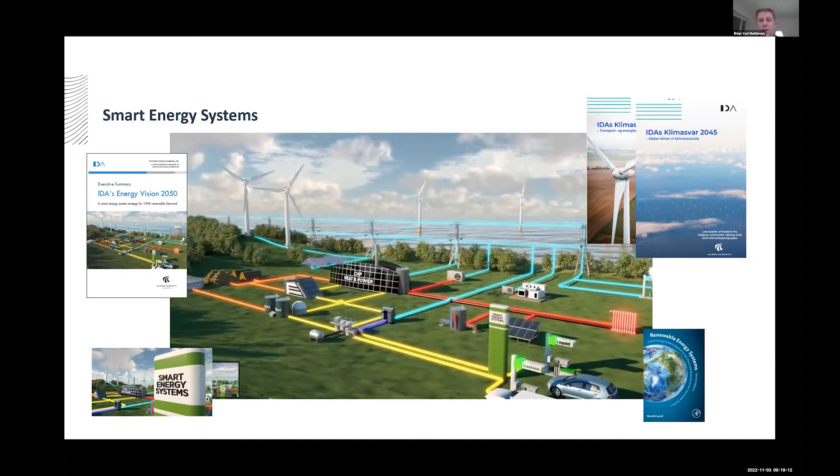So the concept that we look at in my research is called smart energy systems. And smart energy systems means that we use all of the energy carriers to create a much more flexible and robust system. Mainly, probably the electricity grid and the gas grid, but we also work quite a lot with the thermal grid and district energy in order to create more options for energy storage. And by looking at this in a more holistic perspective, we're able to find synergies across the system. And I'll just try and show you here one example that may illuminate what this is about.

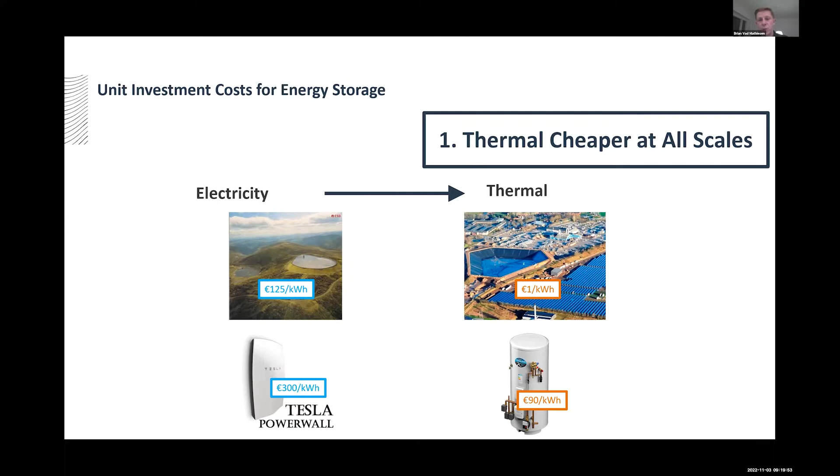If we look at a renewable energy system, all of us know that we have to have some kind of storage. And there's a huge difference between electricity storage and thermal storage. If you have a cheap electricity storage, well, right now the euro is the same as the dollar, so you can relate to it. So it's 125 dollars per kilowatt hour in a pumped electricity storage on a hill. But if you have a really large thermal storage, it can actually be $1 per kilowatt hour. So there's a factor of 100 between storing electricity and storing heat.

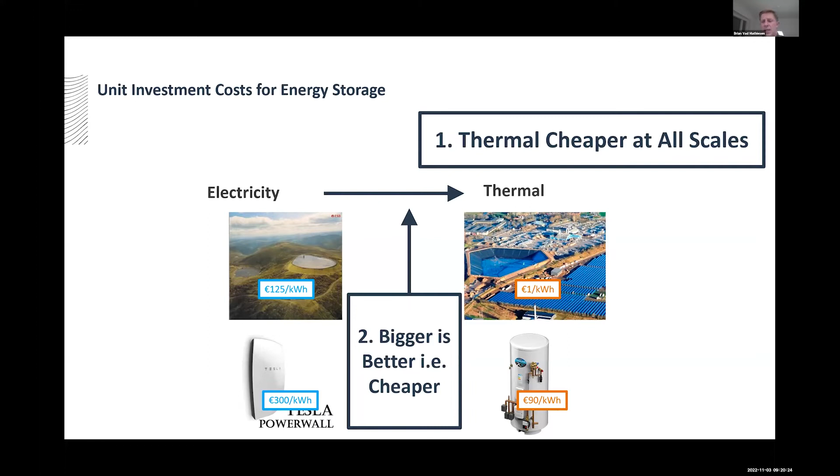And then there's the other principle, which is that bigger is actually better and cheaper. Here we see a Tesla Powerwall is maybe $300 per kilowatt hour, whereas a thermal storage in a household, 200 liters, would be $90 per kilowatt hour. So these principles tell us that thermal is much cheaper than electricity.

And if you put it into a diagram, which is done here, you can see the efficiency of storages and the cost of storages. And what we see is that thermal storage is 100 times cheaper than electricity storage. Gas storage is maybe 20 to 50 times cheaper than thermal storage, and liquid fuel storage is 2 to 5 times cheaper than gas storage.

And when we talk about gases and liquid fuels here, we're over in a power-to-X world, electrofuel world, where we want to create some sustainable fuels for ships and aviation. So that's one thing. And also then there's the efficiency. If you have a battery, for example, or a pump storage for electricity where you want to get the electricity back as electricity, then there'll be a round-trip loss. And by all means, you want to avoid round-trip losses if you can use the electricity directly.

Some may say that, well, we cannot store in thermal energy and get electricity, but that's not the idea. The idea is we store thermal energy in order to have a shower, which we're going to do also in the future, or to heat a house. Batteries we need, by all means we need them, but then, for example, we store electricity in our electric cars or electric trucks, and then we wait with using it until it's relevant for us to use. We don't try to put the electricity back on the grid, because this creates all of these round-trip losses. So this is part of the smart energy system.

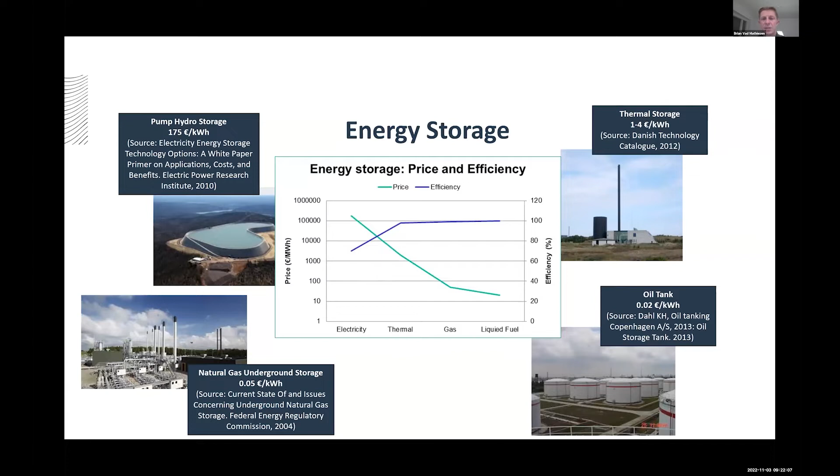Another part is actually energy efficiency. And here we had this project called sEEnergies, where we set up a modeling approach. We looked at buildings, transport, industry, energy grids, and we tried to do systems modeling and spatial analysis. And actually what we did was we created bottom-up models for all of these sectors in order to have a very deep understanding of what is actually possible.

For example, in an industry, you actually really need to know what is in that black box of industry. What are the temperature levels? Do they need steam? Do they need really high temperatures? Is it a steel manufacturer? Or can we replace some of it with district heating? Can we replace some of it with direct electrification or a heat pump? Where do we need to use biogas? Where do we need to use hydrogen? And the same for transport.

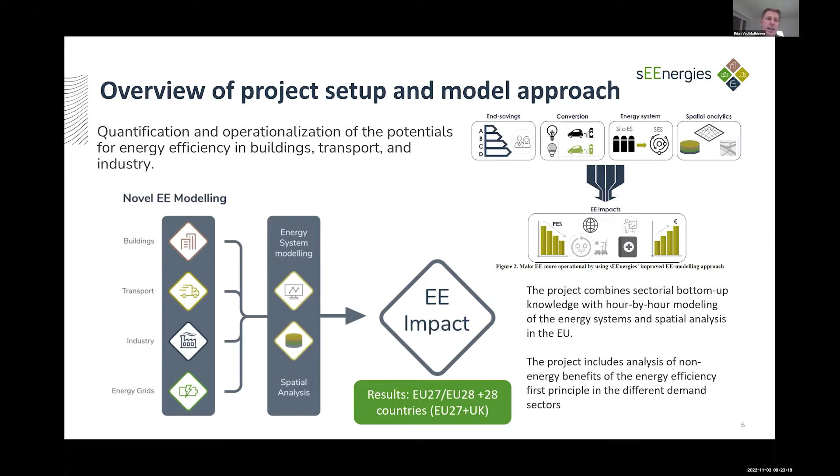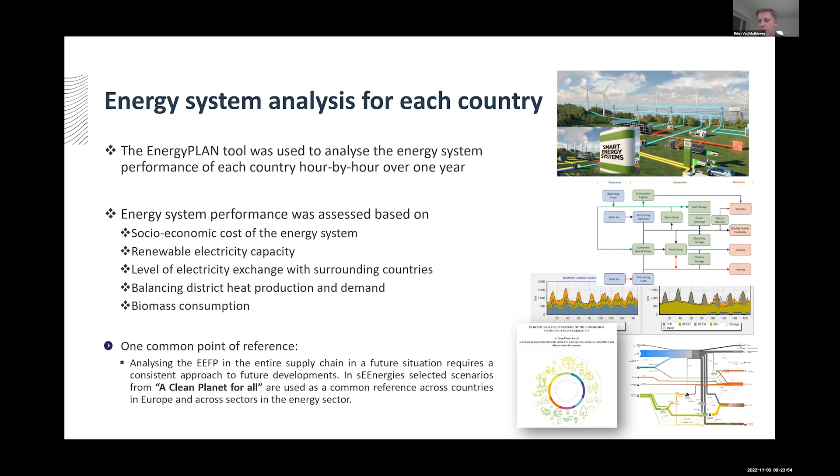So what we tried to do is we looked at all of these countries, and we modeled them hour by hour with the bottom-up knowledge of buildings, transport, industry, and the grids in each country. And in order to do so, we have used this energy system analysis tool, which is a free tool you can download, called EnergyPLAN, where we can look at hour by hour all of the system, and we can get out results on renewable energy capacities needed, the level of exchange with surrounding countries, biomass consumption, balancing needs in the energy storage side, and also the overall socioeconomic costs of such systems.

We have then in this sEEnergies project tried to identify means to actually decarbonize Europe, and we have done so by looking first at each country and then combined the countries afterwards. And when we did that, we compared this with the EU Commission's visions of Europe, and they have also made some climate neutral scenarios, and one of those is called 1.5 TECH. So 1.5 refers to the Paris Agreement, and TECH means that it has a technological fixed focus, you could say. This system still includes somewhat fossil fuels, it has CCS, it has a bit of nuclear. It also has really a lot of energy savings, a lot of hydrogen, a lot of electrification.

And what you see on this diagram here is the 2015 system and the primary energy demand of 18 petawatt hours, and then a future system where there's 13 petawatt hours used. On the final energy side, we see that today we use 13 petawatt hours, and in the future, the Commission has modeled it at 8 petawatt hours. So that means that the difference between the 13 and the 8 in a 2050 system is actually the losses we have. We want to minimize the losses because these are conversion losses.

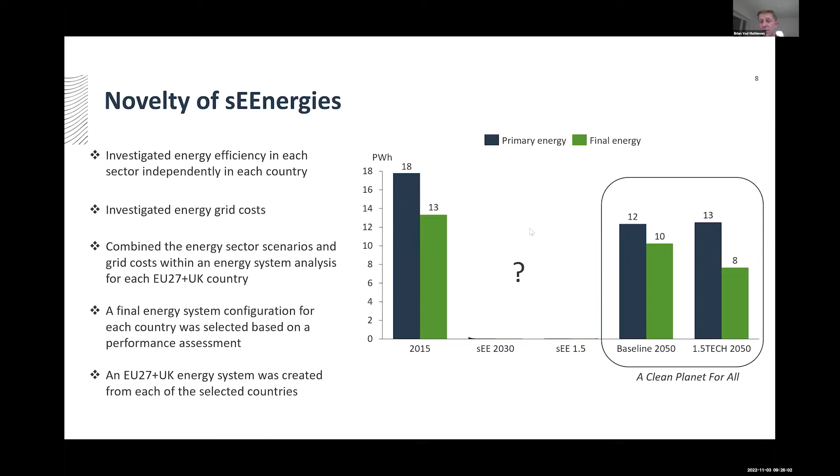For example, one conversion loss could be that we create hydrogen with electricity, and here we have a loss of around 30-35% in just creating the hydrogen. Anyway, when we do this, we're then able to assess this, and what we try to create is a new vision called SEE 1.5, and then we have a 2030 vision. SEE refers to sEEnergies.

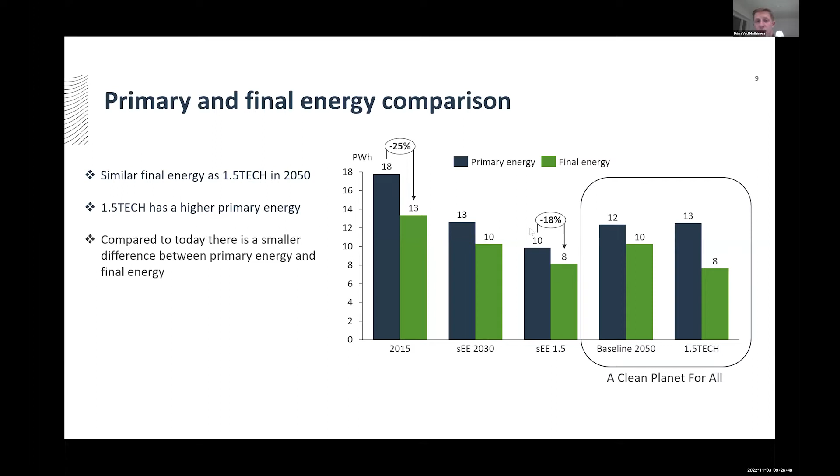Here then the results of our modeling, and I'll come a bit back into the details. So on the far right there, you see the 1.5 tech, the 13 primary energy, and the 8 in the final energy demand. And then you see the synergies vision that we have created using bottom-up knowledge of each sector in each country. And here you see we actually still have the same final demand as the Commission has. However, we have really reduced the losses, which means that our input of renewable energy or primary energy is really quite significantly lower. It's 10 petawatt hours instead of 13 petawatt hours.

If we look at what the mix is, before I go into further details, we can see that in the 1.5 tech scenario from the Commission, you can see on the top here, you still have fossil fuels, you still have nuclear, and then you have biomass and renewable, the yellow one. In our vision, you see we have slightly more wind and solar, 7 petawatt hours, and then we have the same amount of bioenergy, but we're actually able to exclude the nuclear and fossil fuels. If we have nuclear, we can fit it in, it's not a problem, but we have modeled a system where we're able to do it without.

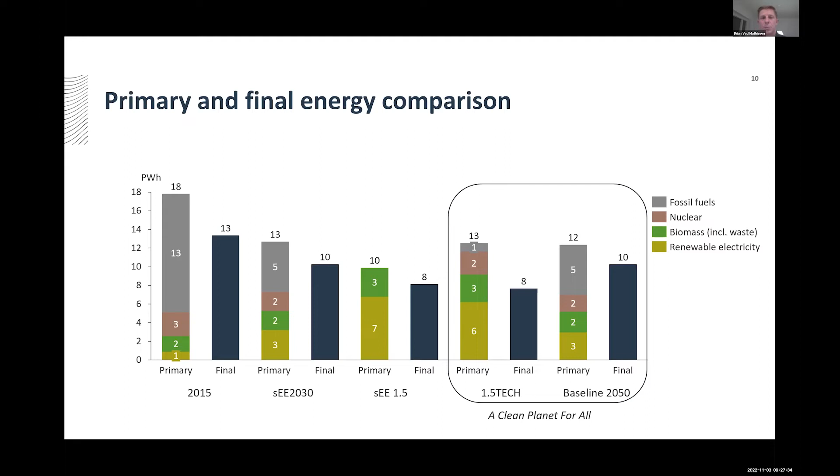Some of you may wonder, so all of this bioenergy, can we use that? And actually, there's quite a lot of bioenergy available that is sustainable. We don't have time to go into all of that, but we have taken quite good care of looking at what is wasted bioenergy that has no climate effect. And this is typically local resources. It can be manure from agriculture that can create biogas. It can also be sewage. It can also be waste. Some of the waste that we cannot recycle, we can use. It can be straw from agriculture. It can be waste wood from forestry and similar.

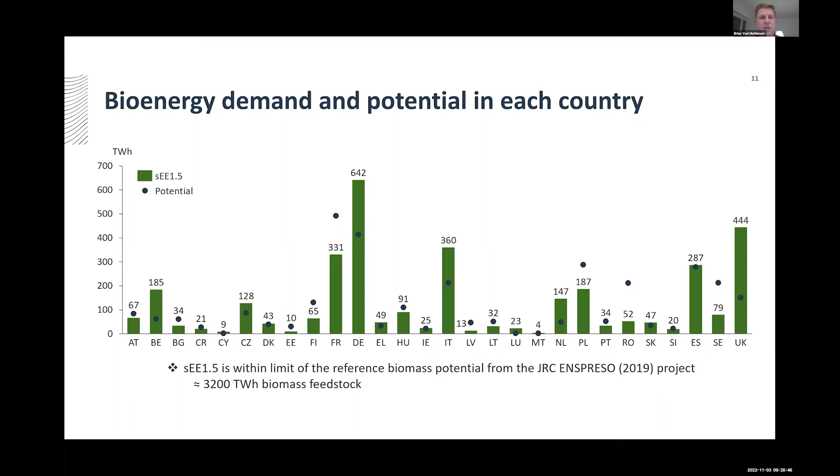And when we look at that, we can see that in all of Europe, we're able to actually create a good balance. But we also see that some countries have less bioenergy than they need. For example, in the middle here, the large one, we see Germany. You can see the potential in Germany is 400 terawatt hours, but actually they need maybe 640 terawatt hours. Luckily, other European countries actually have a larger potential than they need. So there'll be some kind of trade on this side.

Then you're probably wondering about the costs, and costs are really connected to efficiency. The more efficient system and the more integrated system you have, the cheaper the system. And what you see here is the 1.5 tech scenario and a baseline that they have from the Commission side. And then you see on the far right, the scenario that we have created using our hour-by-hour bottom-up modeling. And we are able to actually create a system that is around 15% less costly than 1.5 tech.

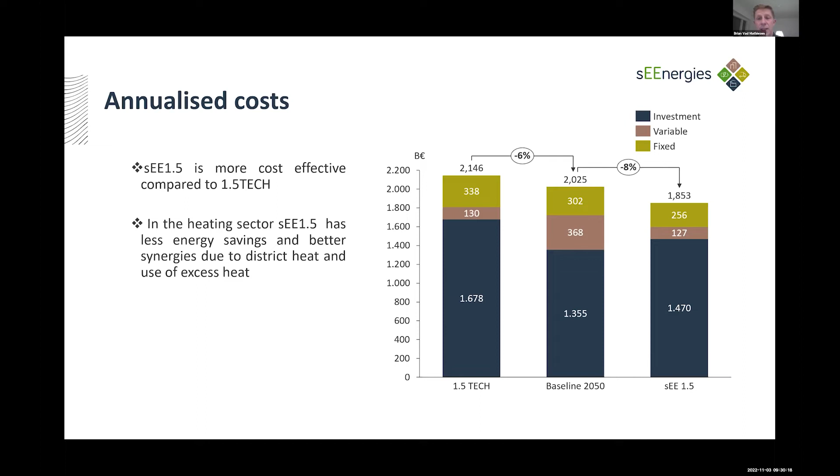And this is really largely connected with the heating sector, because a lot of times what we see is that heating is treated in a way where we maximize the savings in the household. And what the Commission has done in the models that they have used is that they have actually reduced it to an amount that is both economically unviable, but also technically hard to achieve. And what we have done is to create a more balanced system where we are sure we meet quite significant heat savings in the buildings, but then we also integrate the system more and use excess heat. Another key difference is that we electrify more things in industry, we electrify more of transport.

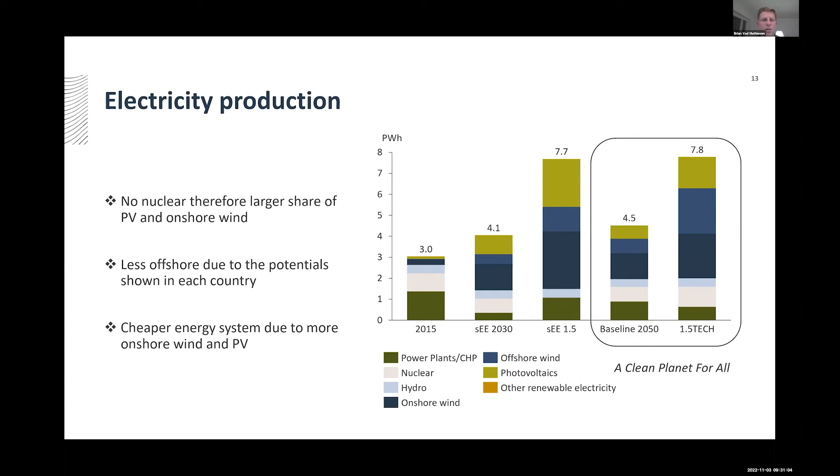In the electricity side, we see that we are able to create a system where we have no nuclear, but we do need quite a significant amount of renewables, around the same actually as the Commission says. We think we should use more photovoltaics. You might be able to see on the top of the SEE 1.5 compared to the 1.5 tech here on the Commission side. Photovoltaics will be cheaper than the offshore. We still need offshore, but if we can have more onshore wind and more PV, we're actually far better off because it's cheaper and we need to transport it less.

On the storage side, which might interest you as well, we have a system here where we more or less have the same amount of hydrogen storage as the Commission, but we have combined it now with thermal storage because we have expanded the use of waste heat and district heating, and we're able to also use some of the electricity in the heating sector much more efficiently. So our storage is bigger and more seasonal compared to the Commission scenario.

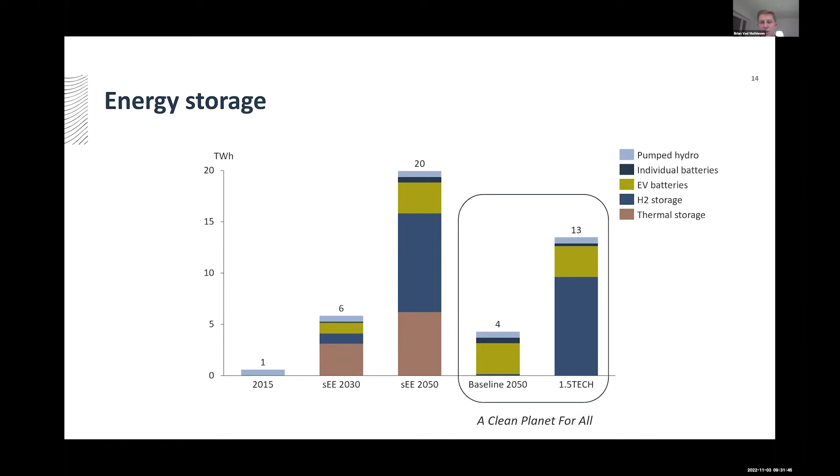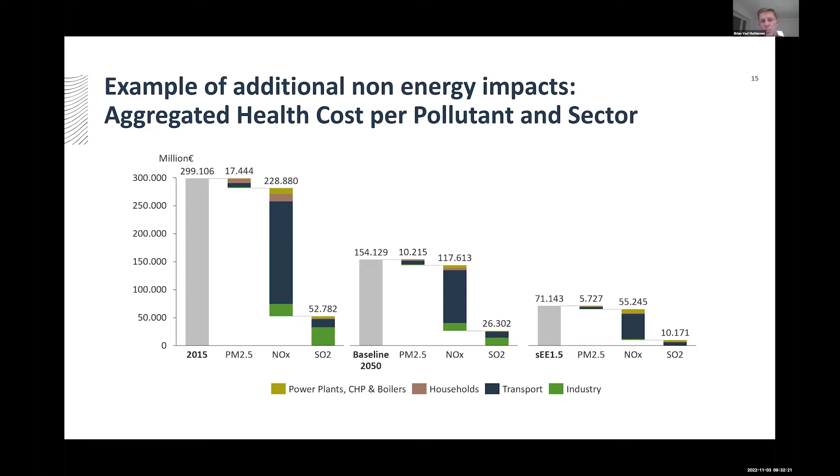Just before I move on, I'd like to also point out the scenarios that we build have a very, very high impact on other things than energy. For example, this non-energy impact is the aggregated health cost per sector. And this is really relevant also in an American setting where you will see a lot of local pollution that has actually a large effect on the lives of those that are near those elements that pollute: power plants, boilers in households, transport and industry.

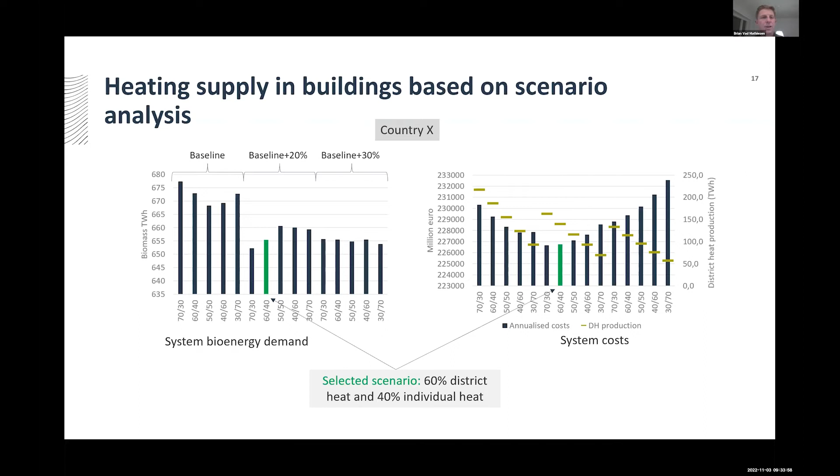Anyway, the heat demand in total, when we look at Europe, is reduced by approximately 40%. And 40% is actually quite a lot. And as I told you before, it's less than the Commission suggests. And to go beyond 40% will be highly problematic because we start to actually want to save quite a lot on the hot water consumption as well in order to meet the targets. And that's actually almost impossible to do. So 40% we believe is a good level. That saves a lot on the cost side.

50% of the heat is supplied by district heating with significant amounts of excess heat as well, and we use around 630 terawatt hours of low temperature waste heat, which is about half of the potential. And we can then also go into different details with each country on how that looks like.

But here you see, this is the Commission scenario on the far right, 1.4 petawatt hours, and we have a system where we use 1.9 petawatt hours, and you see the beige one is much larger in ours. That's the district heating, and actually in the 1.5 tech they have something which is really crazy, hydrogen boilers. So you imagine you put up a wind turbine, you make hydrogen, so you have that loss where you need at least 1.5 kilowatt hours to create 1 kilowatt hour of hydrogen, and then you put it into a boiler to create 40-degree hot water. It's completely crazy, and this is of course something that we completely eliminate because it doesn't really work.

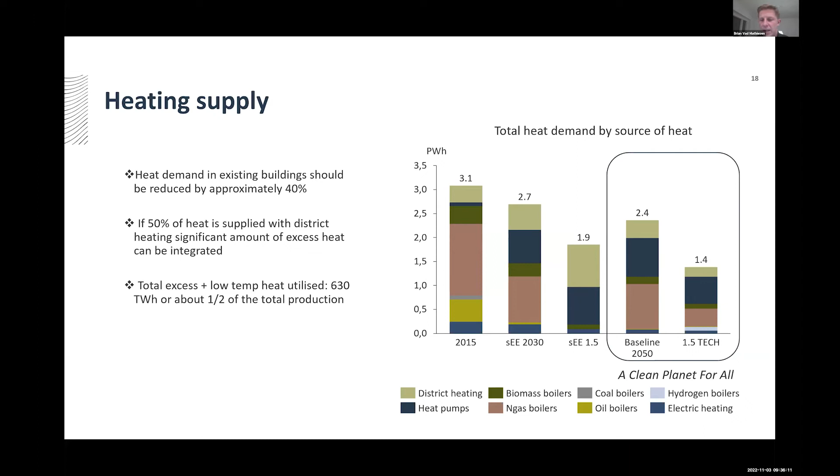If we look at the district heat supply, we used waste incineration. If we start here from the right, we have a slight amount of boilers to have a balance. We have combined heat and power. We have small amounts of solar thermal. The solar thermal is great, but it doesn't really fit too well with the heat demand. So that makes it having a limited potential, so to say.

Then we have low temperature heat pumps. This is really key, because it means that we can use electricity when we have a lot of wind in the system and create district heating, and we can then store that in the large thermal storages that I told you about before.

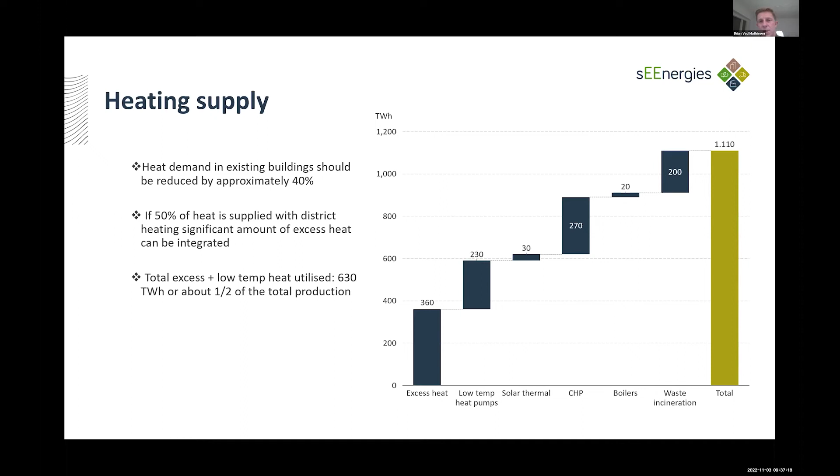Then we also have excess heat, and excess heat we have also used our mapping system to localize, to understand where they are currently placed, in order to also assess how much of this we can use. Overall, we can say for each country, what is the heating mix, how much excess heat do we have from the industries in those countries, and as you might expect, there's quite a lot of industrial waste heat in France, Germany, Italy, the UK, but in those countries the heat demand is also really large, of course.

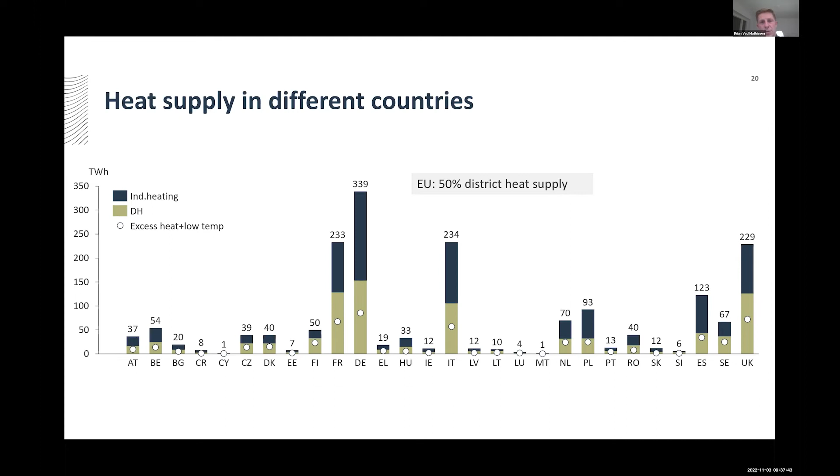When we look at industry, we have created a bottom-up model to look at that. It has really a lot of nodes inside, a lot of data inputs, but what we are able to create is a system where we use more electricity. You see that with the bottom here. We also use slightly more hydrogen because we want to displace all of the natural gas, which has not been done in the Commission suggestions.

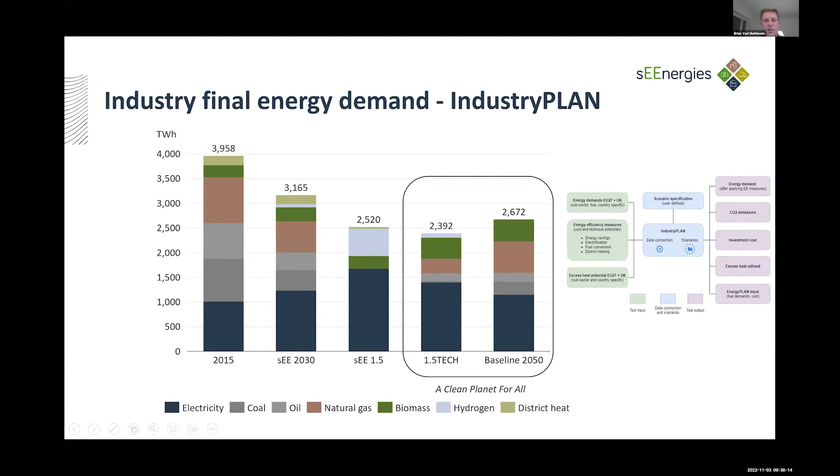When you look at transport, we are creating a bottom-up model called TransportPLAN, where we understand the modes of transport, what the transport trips are, how long they are, what the purposes are, in order to understand how much is the potential for technical changes to public transport or to electric vehicles.

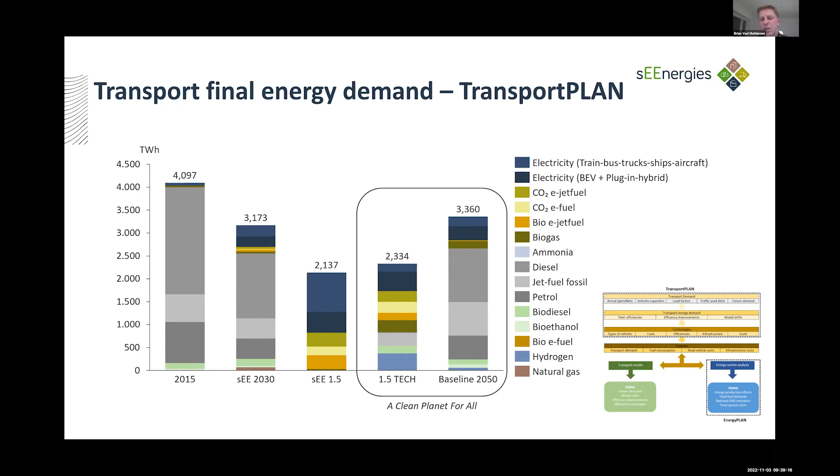And what we are able to say is that the type of infrastructure investments we make in transport is really important. If we invest in roads, we're going to have a growth in road transport. If we invest in rail, we're going to have a growth in rail transport. So here are some key choices that have an effect, not now, but on the longer term. We can also see that we're able to electrify much more when we look at it from a more bottom-up perspective, because the trip lengths are really short when you start to look at the human behavior.

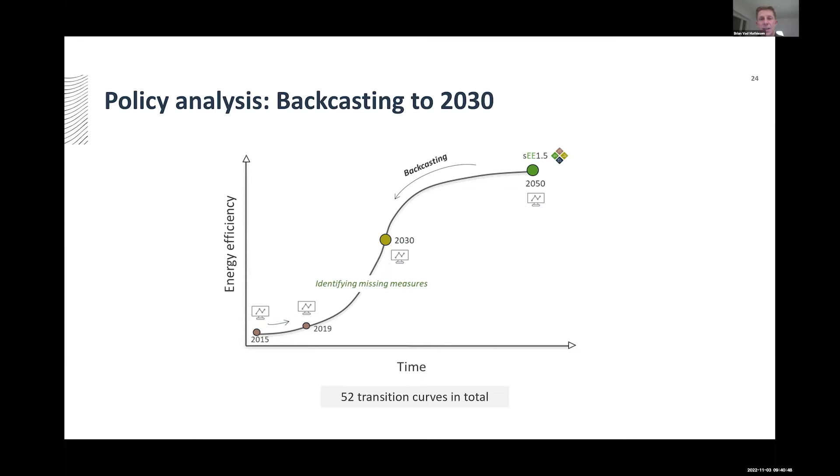And this has also happened during the last half year, when we had the war on the European continent, that European countries have really stepped together, and the Commission has made some really great policies, let's say, to deal with this crisis. And we also made some suggestions to this, and what we did was we tried to see our 2050 system, and then we did some backcasting, so to say, in order to understand what measures could we actually front load and decarbonize, and to get rid of the natural gas use.

And we then made a suggestion on this, and I won't go too much into that. I think the Commission suggestions are actually rather good, but we have then suggested to have less emphasis on hydrogen and more emphasis also on savings and more structural elements. And these policies are called REPowerEU, which is put on top of the EU target of 55% CO2 reductions in 2030.